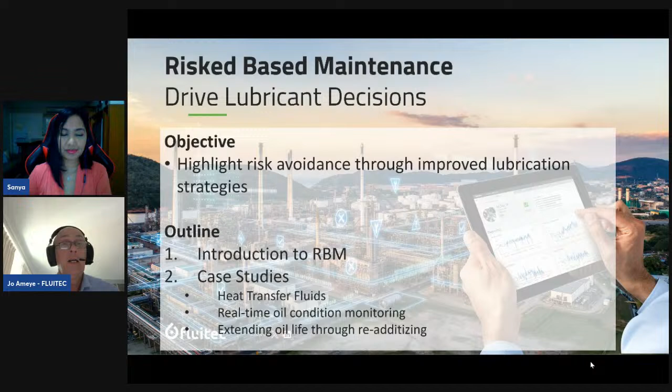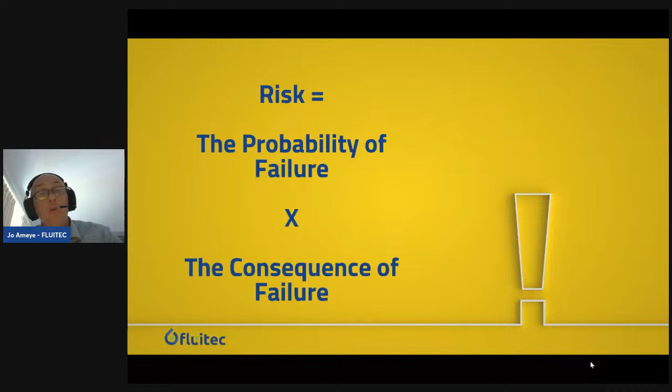If you look at the literature to understand the word risk, it is the product of the probability of the failure multiplied by the consequence of the failure. For football fans, imagine you are in the last minutes of the game and you have to kick a penalty. There is a probability of failure, which through training is very low. But what goes to the head of this player in front of the keeper is the consequence of the failure. That is a good way to understand how we can describe risk.

To describe it even better, this is a picture of a rock climbing athlete hanging on that rock. What is the risk of free solo climbing without a rope? It has to do with the height. At a low height, the probability of an injury is low, and the consequence will also be very low; he will still land on his feet. But if he is very high, there's a higher probability, and most important, the consequence will be pretty high if he doesn't have a rope as a safety action.

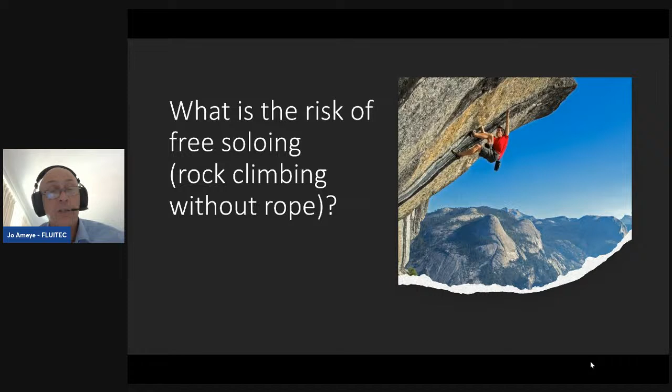So risk-based maintenance can be described by three main parameters, or conditions. First, in the context of maintenance, it prioritizes maintenance resources, and resources in plants are very valuable. They're not always available; that's why sometimes maintenance people are outsourced. Resources need to be prioritized towards assets that carry a high risk if they were to fail. That's why many chemical plants divide equipment into levels of criticality, and prioritize maintenance resources as a function of that criticality.

It's also a matter of using the most economical application of the maintenance resources. Make sure they can perform their tasks in the best conditions based on their skills, and that these efforts are optimized.

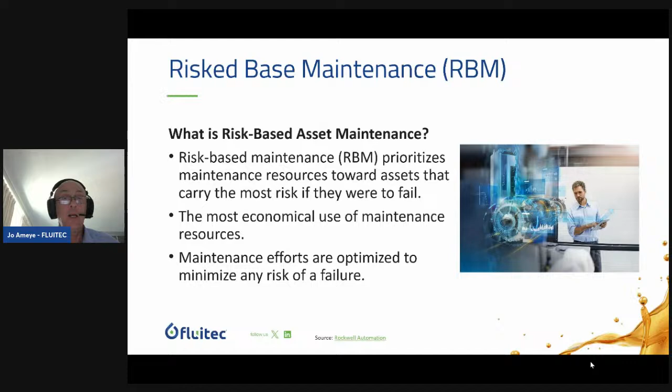And through the presentation, you will see that this will come back. These three, I would say, base rules of risk-based maintenance for your different assets. And you heard me talking about asset criticality, and this is what we call this criticality matrix.

We see on the left side the different categories. So you're going to rank the severity across multiple categories. The severity is on top. You can see 5 categories from minor to catastrophic. And then you will see on the left side the five different categories. And once again, it's more than just cost.

I see too many times when I'm in the plant, they focus on making sure that they're going to be within budget for their maintenance interaction. But yes, there's also environmental aspects. Just think about if you have some pollution occurring. Think about your wind turbine in the middle of the sea.

Production, if you have a minor stoppage until an extensive stop, for I would say a critical compressor who is delivering a gas which is used further in the plant. Maintenance equipment damage also, which can go from minor damage to destruction.

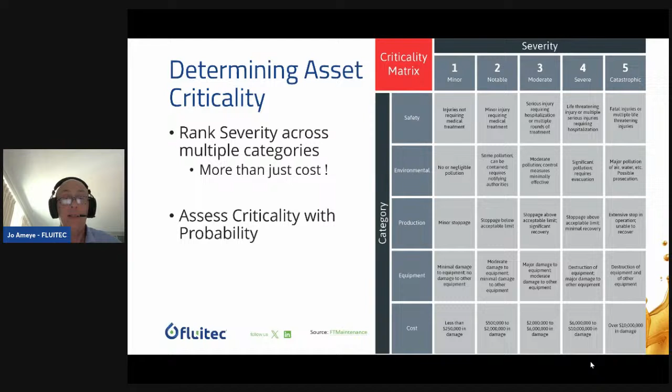And let's be very honest, we all know that an intervention or a maintenance action and opening an equipment is always containing a certain amount of risk. So avoiding to open it is, of course, reducing significantly the risk. So that is why in this matrix you can assess criticality with probability, and so which companies can benefit the most from this risk-based asset maintenance?

Well, first of all, imagine that you have what I already told you on the other slide, that you have categories of high-risk machinery. Fast rotating gas compressor, or maybe just a very special pump gearbox. So it's clear that you need to look at and categorize this high risk machinery and prioritize the maintenance resources.

Or maybe companies that are using very expensive machines. And if you look at today investments for turbines, gas turbines, steam turbines, even pumps can go for quite high amounts. And then last but not least, which I believe is today a very hot topic, it is the limitation of maintenance resources. Not only having the competences, but also the staff.

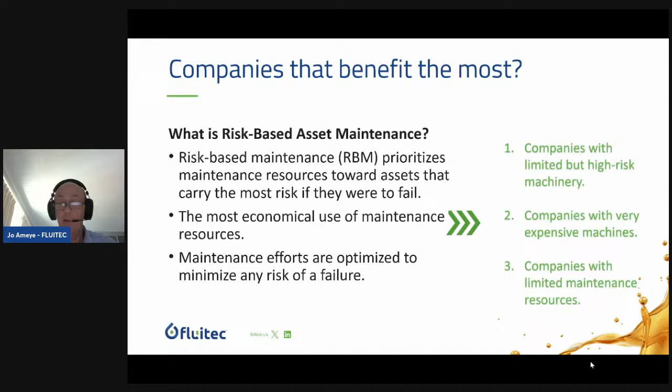For example, in July, August, people in Europe take vacation. Are you going to be sure you will have the right maintenance resources available? So you need to optimize also these efforts across your maintenance team. And that has, of course, because that's what we talk about today, we talk about lubricant case studies. What is the impact on the lubricant decision?

That means if you have this RBM and you prioritize, you make this matrix of actions, this RBM plan with dedicated resources, that means that they will need the most attention from your reliability engineers with a program, with objectives, with specific tasks. And lubrication tasks include here the flushing, the oil changes, PM strategies, oil analysis, condition monitoring.

So those are all tasks that are part of this RBM plan that you create and where you can then also relate specific lube strategies and decisions once again to reduce that risk. And it's part of the probability, yes, of course, but also what we know the impact it will have on possible production and other aspects.

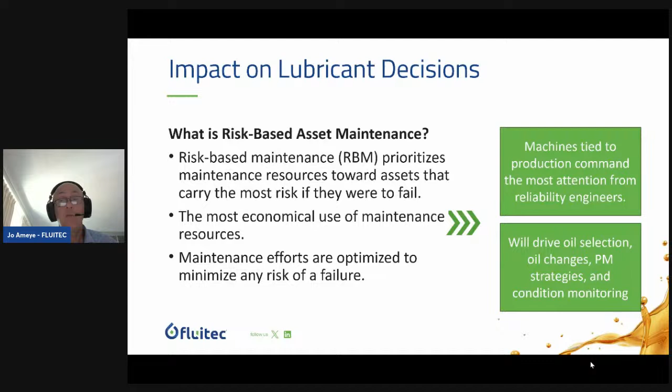Of course, this is very industry dependent. It's clear. If we look at refineries versus a nuclear plant, which is working in steady state power conditions, versus a chemical plant with varying operating conditions, it is different. So it will also need a different plan.

So based on that, for a lubrication engineer, making sure that you collect machine data in advance, oil analysis reports, operating machine data, temperature, bearing temperatures, vibration data, then evaluate possible risks of failure with its consequences, then you rank them, you make your RBM plan, in team.

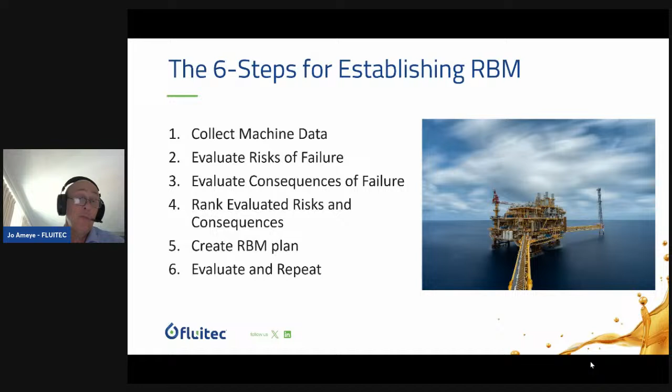This is a teamwork. It's clear that you have people from health and safety, maintenance, plant management, logistics, and you evaluate, and possibly you can then repeat them for future operations, optimize them. But clearly, the collection of data in advance, and that's why often interventions for equipment started 2-3 years in advance of a major revision. But it also applies for an unplanned revision, which is usually taking only like 2 or 3 days.

So that was a 50 minutes introduction on RBM, which I hope clarifies what we understand by risk-based maintenance. We have now selected 3 case studies which we thought would be of interest to prove these RBM strategies. And the first one is heat transfer systems, which is once again very widely spread in different industries.

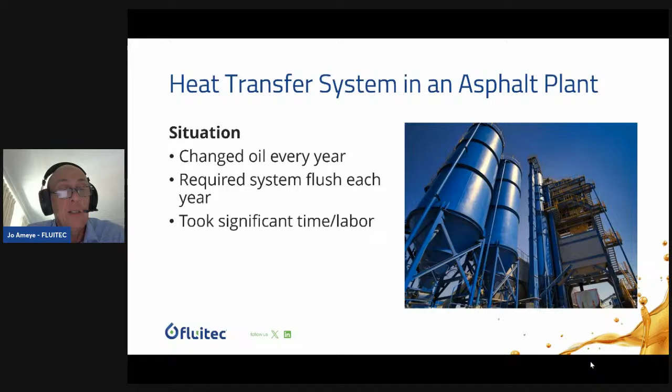But we took here an application of asphalt plants, where the situation is that they change this large oil system every year with the flushing, and as you can imagine, for those who are in maintenance, oil changes and flushing take significant time and labor, with, of course, once again, risks. And in this heat transfer, well, it's fluids which are extremely hot. They're working up to 275 degrees and higher. So there's a safety risk with that.

H&S, health and safety, the environmental risk with chance of oil spilling during the flushing and the cleaning of the system, recharging. It is, we know, a specialized business with specialized resources. And last but not least, every time you open a system, you have the risk of contaminating the system. And in this case, it can be contaminated with flammable contaminants working at very high temperature, or even in some cases, some residuals of the flushing oil.

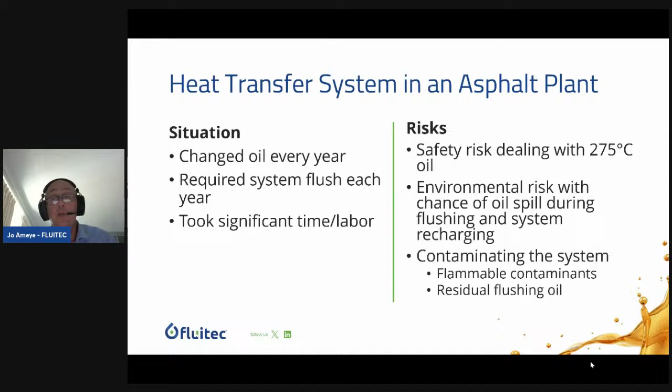I've been too long in business, and too many times you go to a plant and they say, yes, it's always been like that, and we know the risks of an oil change. We know it, but meanwhile, it is clear that there are factors that you cannot always evaluate, and it's important that you do that. For example, here, if the system becomes thermally imbalanced, meaning that you have not done the oil change correctly, then it will impact production.

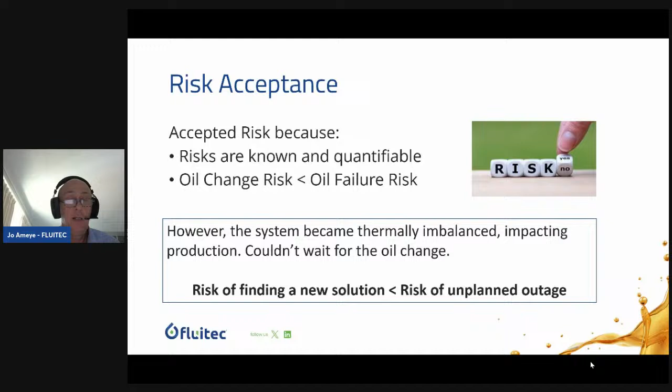So in the case of heat transfer fluids, which are degrading and reducing viscosity, having a lower flash point, you can either go for an unplanned outage, which is a high risk, or there's the risk of finding a new solution which is lower than the risk of the unplanned outage. And that's what we evaluated. In this case, we have looked at a solution which is called the solvency enhancer technology, which I will introduce in the next slides.

But in this case, the risks that we were quantifying to defend this proposal were the potential fire hazard, incompatibility being avoided, deposit transfer, and it's clear that there were risks of an oil change that could be avoided. That's why we decided to apply solvency enhancement. This is a case study based on Mobil Solvancer, but Mobil Solvancer is a co-branded product from Fluitec through Mobil Corporation, and it's based on our Decon technology.

And if you look at the risks, as opposed to what we propose: fire hazard, no, there's no fire hazard. The product is approved up to 300 degrees C. Incompatibility is avoided also because the solvency technology is 100% compatible with base oils from group 1 to 4. In this case, it's a mineral fluid where we did the intervention. Risk of deposits: well, that's an improvement we do with solvency enhancement. We are going to dissolve these deposits, and there's certainly no risk of further deposits transferred into the system.

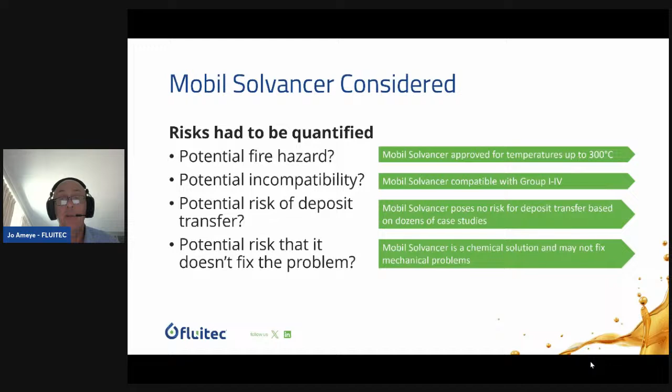And is there any other risk by applying the solvency technology? Well, it's a chemical solution, proven technology, but of course, we are not going to be able to fix a mechanical problem. Imagine that one of the pumps of the heat transfer system is in severe wear because of deposits. Yes, it's clear that that pump is worn out too far. You cannot resolve that. But from an aspect of risk reduction, well, it will be very low. That's clear.

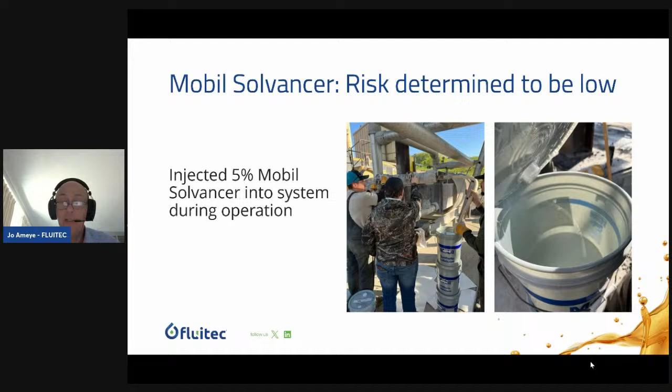And here we see how the 5% solvency enhancement was injected from the pails during operation into the system to restore, and that's important, the thermal balance. I repeat, by thermal balance I mean that during degradation of these heat transfer fluids, you're creating components from a cracking process, a thermal degradation process, and they have a higher volatility.

So that means that the thermal balance is affected. By restoring this, we had not only an increase of plant capacity because you were able to cool more the fluid, the system. That's important. It's a heat transfer fluid.

But also, because of the lack of deposits on the internal tubings of the heat transfer, we had a 20% decrease in fuel consumption. And today, knowing the prices and also the impact on CO2, this is from a sustainability and economical viewpoint a big advantage. No hot oil breakdowns.

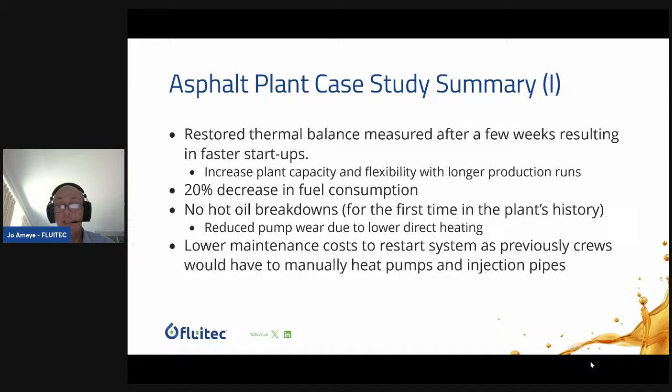Like I told you, usually these result in pump wear. For the maintenance crew, they were very happy, because for them it was much lower maintenance activity, lower costs, rather than having to clean manually pumps or injection pipes, which, for those of you on this presentation who know about heat transfer, is a

time-consuming activity. Finally, on this asphalt plant, the risk was very low now because the plant skipped the oil change and is running for another year, and that will probably be longer than one year because the solvency enhancement is not degrading. It's a continuous process, keeping activity.

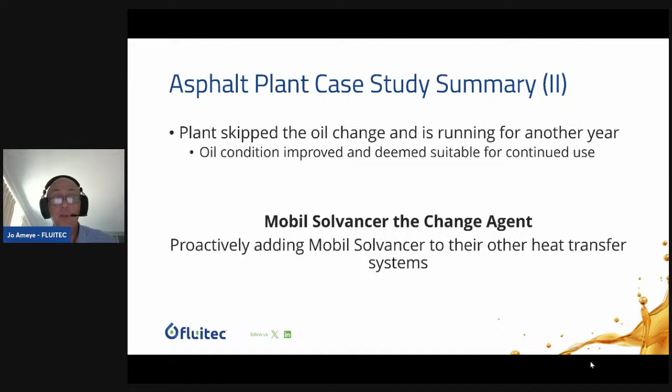And now we are also going to add this solvency enhancement to other heat transfer systems, just to avoid further maintenance issues. So that was a first case to highlight how you can approach improvement in lubrication strategy from a risk-based approach. Another case study was very interesting.

This is an industrial gas turbine at a U.S. university, where the oil sampling was performed very regularly, and still they had an unplanned outage that occurred. Here our approach to reduce the risk and probability of failure in this program was to work towards online sensors to mitigate the failure.

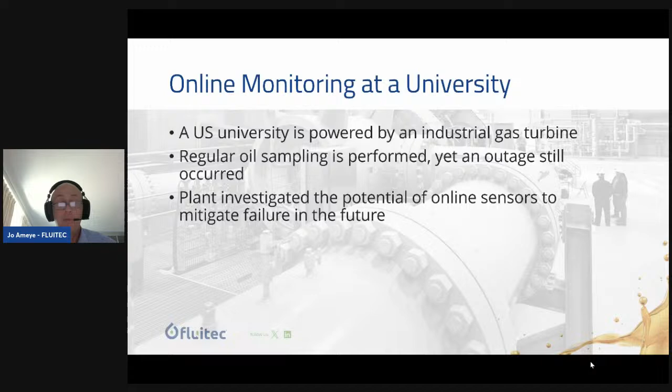This is very unique. I think this is the first time we present this data publicly. When we look at the oil analysis trend, which is the viscosity here, together with the acid number, you can see how this university did a very regular oil analysis. You can't be better in frequency.

Unfortunately, we noticed there was a missing parameter which was not measured: the antioxidants. So when we did the antioxidant analysis, we noticed that the oil was depleted of antioxidants. RPVOT was less than 30 minutes.

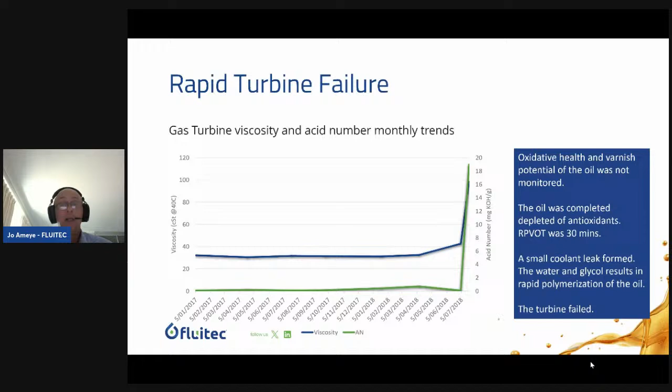When we did root cause analysis through infrared, we noticed there was a small coolant contamination. In fact, it's a combination of glycol and water, which reacted with some of the oil degradation products and created rapid polymerization of the oil, creating this high viscosity increase.

The criticality of this turbine was clearly very high, and the cost impact of this downtime is also very high. The plant did everything they should have done. Unfortunately, the missing parameter was the antioxidants.

They could have included that in the oil analysis, but here our approach is to reduce the risk of possible failure, and being a critical application, there's a justification for the cost of the inline sensor, which is, of course, higher than the cost of oil analysis.

That is clear. But if you approach it again through this RBM matrix, the cost of the inline sensor is still far below the cost of a downtime. So the inline sensor presented here absolutely justified against any future downtime.

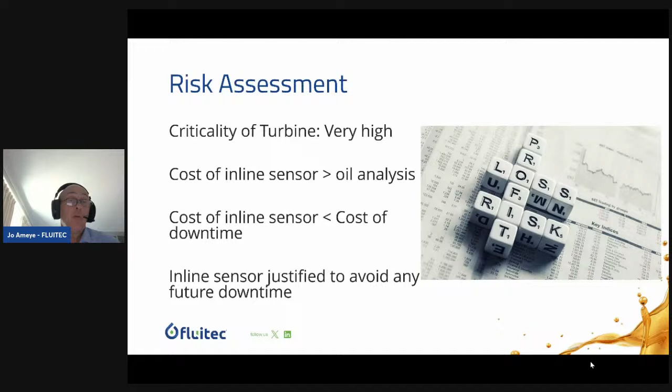And let me tell you, it's not only a matter of cost. Once again, it was the risk that we wanted to keep under control. When we looked at this turbine oil, we clearly saw, when we simulated this same oil through an oxidation lab testing, it was confirmed because you could see how the MPC trend was showing an opposite trend versus the antioxidant depletion.

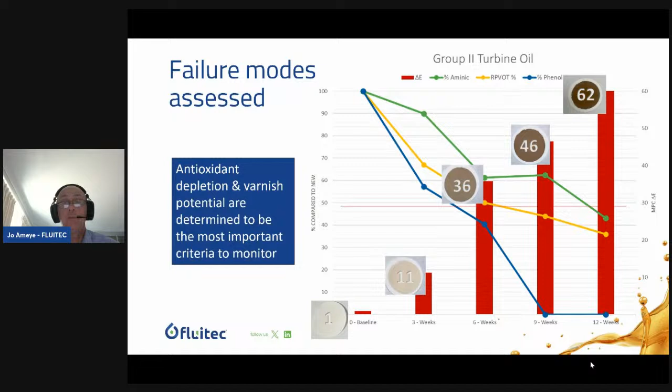So clearly, the two major parameters needed for monitoring this oil would be oxidation by varnish, but also, very importantly, the depletion trend of the individual antioxidants, being aminic and phenolic antioxidants, over a 12-week time, which is of course quite excessive at 120 degrees C. It's a significant stress time, but antioxidant depletion would be a very good criteria to monitor.

When we went to sensor selection, we built up this matrix of different sensors available today for molecular analysis, where we look at either the capacitance or the dielectric constant, impedance spectroscopy, mid-infrared analysis to look at the molecular bonds of, for example, antioxidants or degradation products. On the other side, the gray graphs focus more on wear particulate analysis, either by magnetic flux or laser particle counter.

On the left side, you see all the abilities to which the technologies would have to correspond, with its weight. For example, let's look at the ability to measure antioxidants. We put a weight of 4 because it was proven important from oxidation testing, which is also weighted 5. Wear metals we put a 1, because wear did not occur here as a major degradation mechanism.

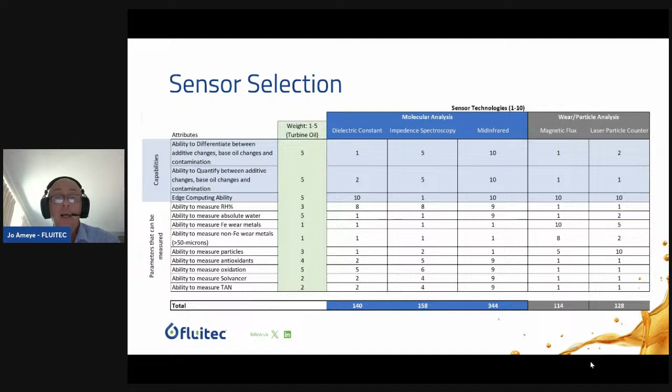If we then look at those 5 different sensors and attribute the total points in this sensor selection matrix, we can see that the sensor based on mid-infrared, taking the mid-infrared spectrum to look specifically at antioxidants and oxidation products, is weighted very highly. Of course, mid-infrared is not performing well for wear metals, but that's not weighted very high either.

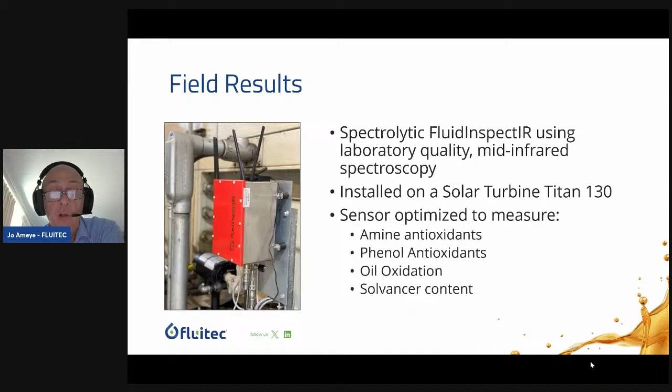So at the end, it's clear that the sensor selection based on mid-infrared outperformed other sensors for this application. It was optimized to measure both amines and phenols online, as well as oil oxidation and Solvancer content, with some typical graphs you can see here for the mid-infrared zone.

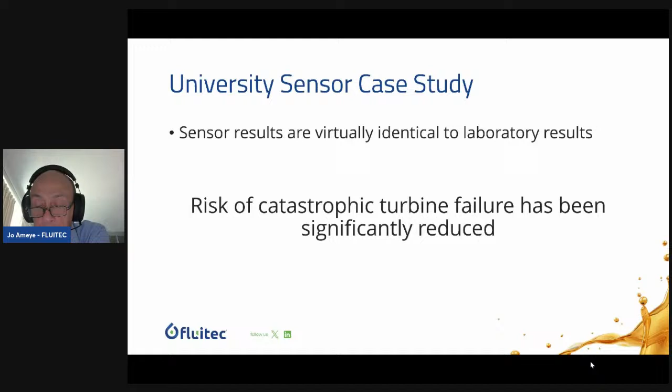The last 5 minutes is my case study number 3, a case study that we have been able to share with ExxonMobil, from one of their assets using a propylene refrigeration compressor, on lube oil lifetime extension.

What do we understand by that? Let's look a little bit at the background. This is a critical compressor commissioned in 2012, using an ISO VG46 oil, quarterly monitored on volume, which is quite significant because it's a drive line for this motor, compressor, and coupling: 36,000 liters.

Operating conditions showed that the condition of the train was healthy, and the oil analysis was also done regularly. But the oil analysis showed an indication of depleting antioxidant additives.

Was that the motivation to change your lubricant? Well, if you look at it from a risk perspective, risk avoidance, you would say no, let's not try to change the lubricant, because opening such critical equipment with 36,000 liters of oil, I would not do that.

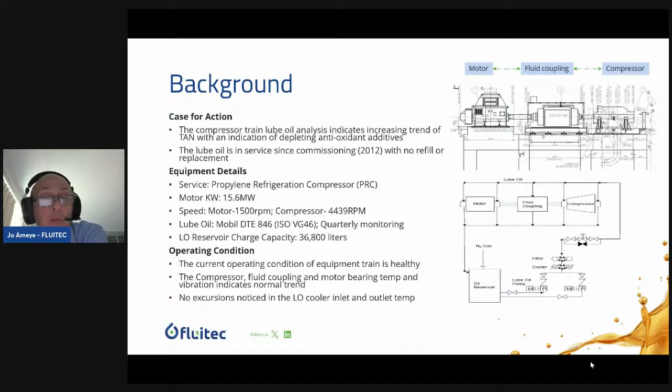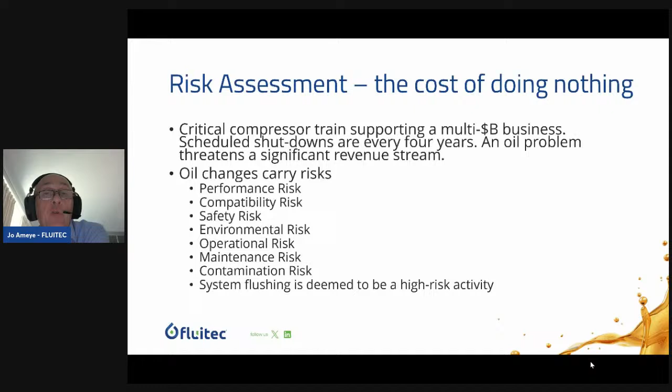So after assessing this risk factor, the plant decided that re-additizing with antioxidants would bring the compatibility, safety, and operational risk to nearly zero, or at least extremely low, just by adding fresh antioxidants to the system.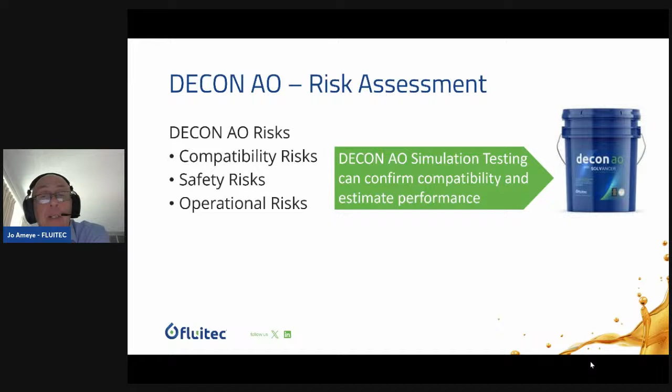We first did simulation testing to confirm compatibility versus ASTM standards, and then also to estimate performance—meaning how these fresh antioxidants we add will react synergistically.

And yes, it was confirmed that adding the antioxidant to this in-service compressor train—and I repeat, this is done with the compressor oil, with the compressor in service, no need to stop—using this mixture of antioxidant and solvency enhancer carried a risk much lower than oil failure, and also lower than an oil change.

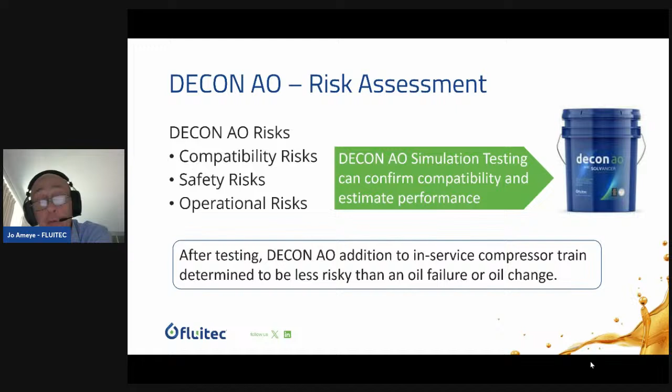Here we can see how we did versus ASTM standard tier 1 to tier 4, with all testing parameters up to RPVOT, rust prevention, and copper corrosion.

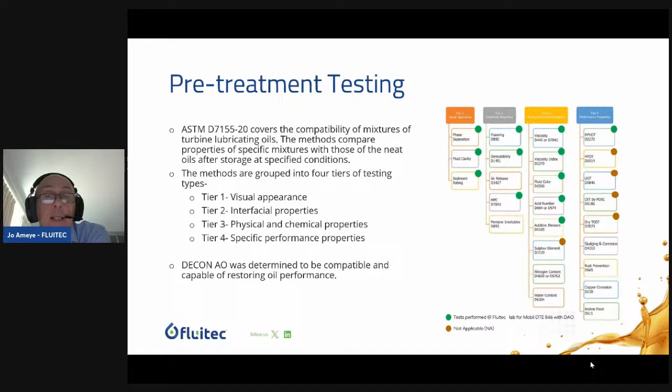From this test matrix, DECON AO was determined to be 100% compatible, and restoring—this is important—the oil performance to the quality of a new oil. That, I think, is very unique. So in this case, DECON AO was added after testing, with a very strong oil analysis program, and here's some data I've selected for you.

Acid number was reduced to an acceptable level. We also had a look at the MPC dropping from 20 to 4, just because of solubility enhancement, and most importantly, aminic antioxidants were brought to a level even better than the new oil, to 100% and better.

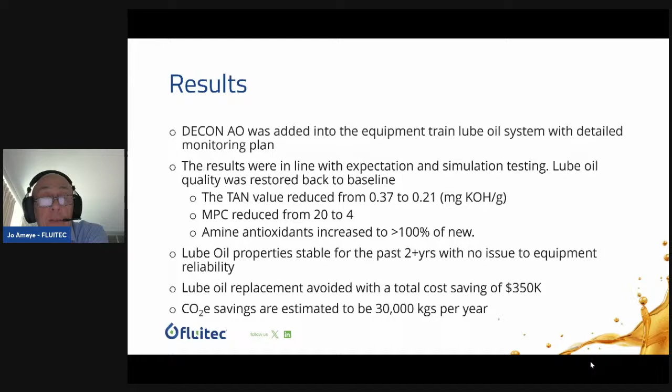You will ask yourself, how is the oil now? Well, 2 years later, the oil condition is still very stable, no issue at all to equipment reliability, and yes, on cost savings, you can see the number here, quite significant. I'm not even assessing the risk here, which is really zero - there was no impact at all. And today, when we talk about health and safety and sustainability, CO2 savings here are estimated at 30,000 kilograms CO2 savings per year.

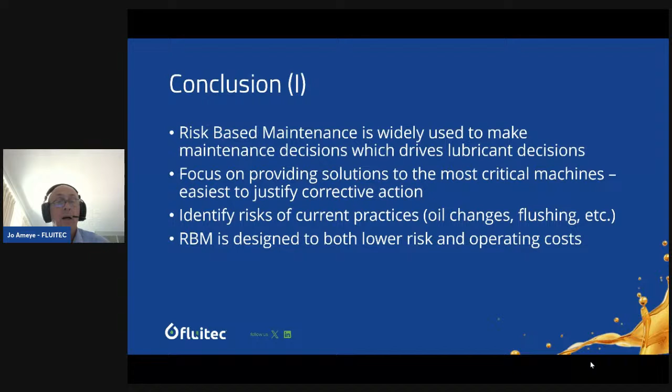So here we are with the last slide. It's clear that for people in lubrication strategies who have to make decisions related to lubricant, RBM is certainly a very useful tool and widely used, supplying solutions not only to critical machines, but it will also justify corrective actions related to oil changing and flushing. It will impact not only risks but also operating costs. Technologies at Fluitec that are aligned with these lubrication strategies, with lower operating risk, and can be integrated now into RBM strategies, are of course extending the lifetime of your lubricants and restoring system performance.

For example, in the first case, heat transfer systems - think about hydraulics, wind turbines, and more. Provide online monitoring in critical assets. And then, of course, at the end of the day, reduce your turnaround maintenance with limited resources, and lower carbon footprint in industries like power generation or refineries.

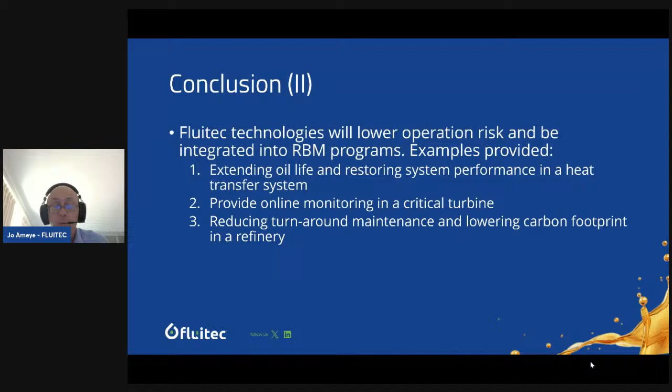Sanya, I'm through my slides, 2 minutes longer than planned, but I hope this was a learning experience for all attendees. So here we are.

I think, first of all, thank you so much for going through these slides and giving us some more context in terms of what we can expect with risk for the lubrication system. Because once we have any sort of system operational, we often forget about the risk involved, and we forget that there are bigger impacts to what we can and cannot do.

I'm gonna... do you want me to? I could remove your stuff from the show if you want. I'm there, yeah, yeah. I was thinking the same. Thank you. All good, all good.

You did a great job in terms of helping us understand why we have so much operational risk involved in simply changing oil, or understanding if we had some sort of degradation happening. Because I think that's where we have a lot of hesitancy. We think there's no risk involved when we start doing these changes, or if we're monitoring the oil and we start seeing decreased antioxidants or MPC levels going up.